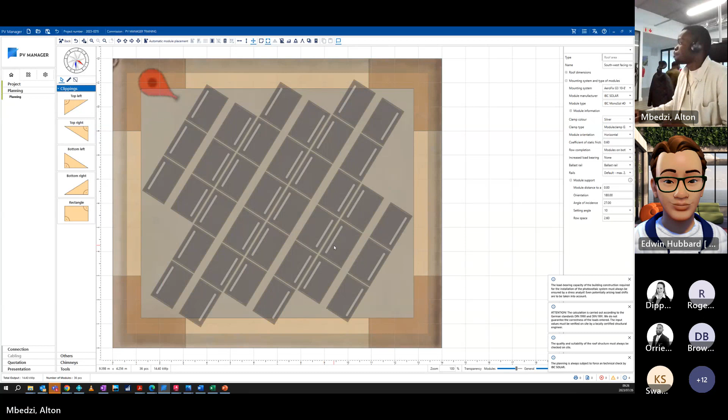You just double click onto that square that you put in, or that building that you put in, and then this is what will come up. And then you can now decide to click on automate module placement. Now this is where you'll decide if you want to stack as many panels as you can, using full roof area, maximum number of modules. And you just click OK. And then you'll be able to see, okay, this is how many modules I can fit in, maximum.

But in this case, I want to be a little bit more specific to say I just want to put on 10 panels and I want them to face north. So then just say, okay, let's go to the mounting structures. As you can see here, you have Aerofix G3 8 south, 8 east-west, 8 south, east-west, south, east-west. These are all our Aerofix G3 modules with different degrees and inclinations.

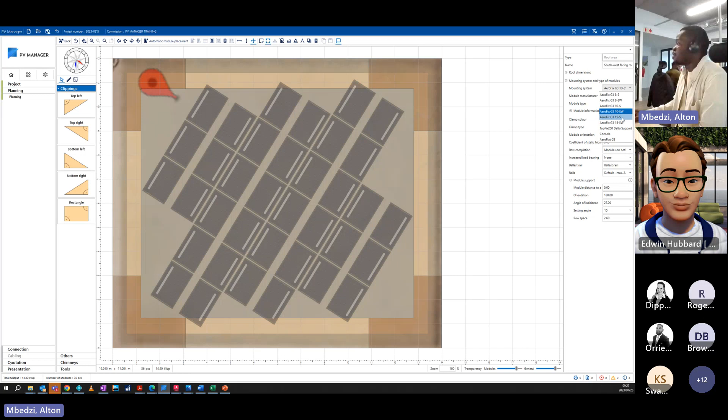So we will then work with, for instance, I'll pick Aerofix G3 15 degrees south. So I'm not being specific. And then I'll just click on that. And then I want to choose which modules I want. So I'll show you now - let's say I pick Longi.

If you click there, you'll see nothing is happening on my module type. This tells you that Longi is not compatible with our mounting structures. If you come across that, just know you need to pick a different module, because perhaps, as in this case, the Longi modules are actually bigger than 2.1 in length, and our modules only do 2.1 maximum. So pick a different module, Jolywood.

Same case there, so do not be shocked, maybe thinking there's a glitch. It's just that PV Manager is trying to block you from doing a design because it knows the module will not work.

So I'll then pick IBC modules, and you can see the module list comes up, which tells you that these modules do work with the mounting structures you've selected. I'll then pick, in this case, our 410 bifacial modules, and click it.

Now for clamp colors, since those are black modules, I'll pick black. And for module clamps, G3s, which is our latest mounting structure - you always pick the G3s. So it's very important that you know our mounting structures to do a PV Manager design, because that will help you in designing. If you're designing something, you want to know what you're working with.

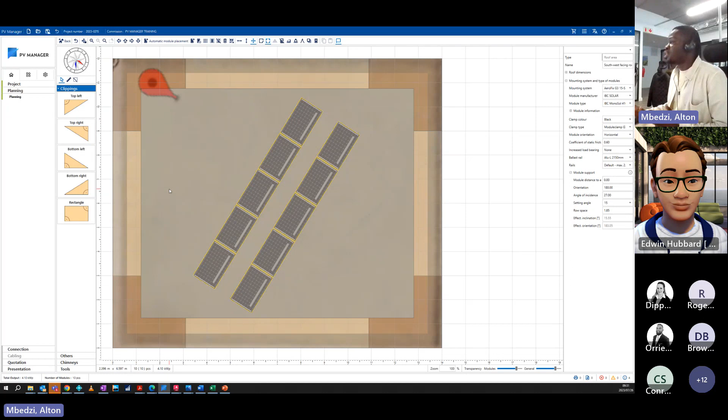So now I have my modules put in, and I'm happy with that, so I just click back. And there you go, you'll be able to see your modules there. Then, if this is what the client wants, you can send it to your client to show him how you'll be putting your modules. You can always do it according to how - for instance, you could put your modules there because you still have enough place.

But this is just for training, just to show you how to use PV Manager. So once this is done, as you can see, everything is green, meaning you're all good to go. We then go to connection.

Now connection will help you determine what inverter you need to use. You can see there that it's gray, so no information has been placed in yet. So I'll click on inverter configuration and go to group 1.

Now what you'll see is the manufacturer. This is all the inverters that we do sell. You'll see Fronius, Goodwe, and SMA. We do sell Victron as well, but Victron has a separate MPPT, so that's a different case. We are able to help you in designing a Victron system. If you do need help, contact your sales manager, and they will point you towards the technical department, and we'll offer you support on that.

So for today I'd like to use Goodwe. Goodwe has the new ES20s. Actually, let's do SMA instead. I'll choose SMA because I want to put an SMA. I like the system, I like the inverter. It's nice.

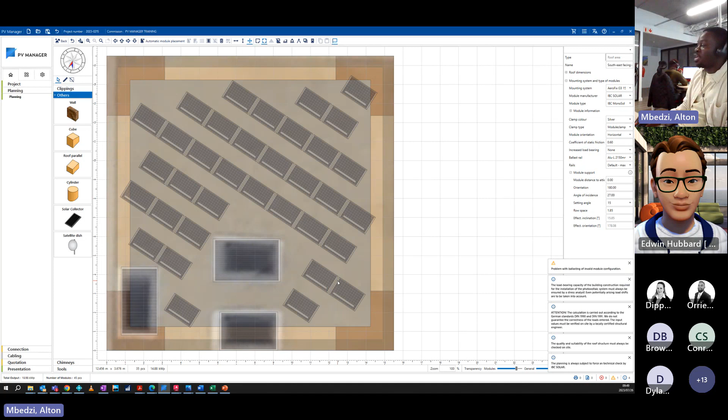Just something to note, which I didn't mention. And then your ballast rail, we did mention that we don't have ballast rail, so you have to use your Alu-L. It's very important that you know our mounting structures, and you can use different modules. You can pick maybe to use, okay, maybe let me use 425 in this area. We'll do that, and then let's populate. And then we have populated on our roofing. So let's say, for instance, now I just don't want to put so many, I'd want to put maybe 10 also.

So on this section, you will see warnings and information such as this. Planning is always subject to a technical check, which will then be done by a structural engineer when you go inside.

So let's just do it this way. Let's say, okay, let's move our modules. Just want to show you how that's done. So that's how you move your modules. And if you want to delete a few modules and say, okay, maybe I don't want 10, I want 4, you can just select and delete.

Okay, then we go back. Then you are able to do a 3D view. It does take time if you want to do the whole roofing. You can do a 3D and just click on that picture there, 3D view, and your 3D will come up. Just see which window it's coming up from.

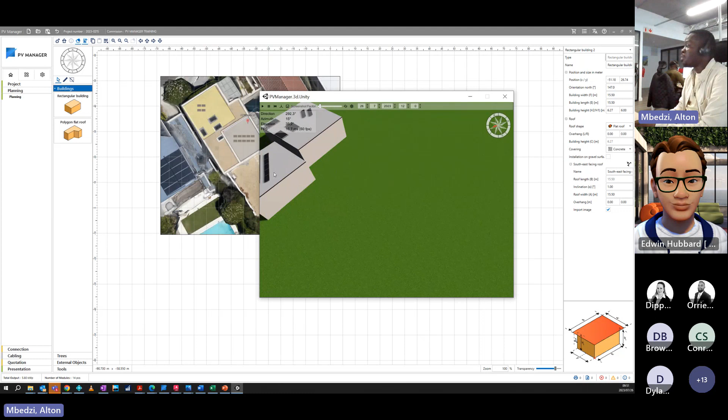It's coming up from a different window. So if you have a look, if we did a full proper design, we would then be able to have a 3D view such as this. As you can see, it's a flat roof.

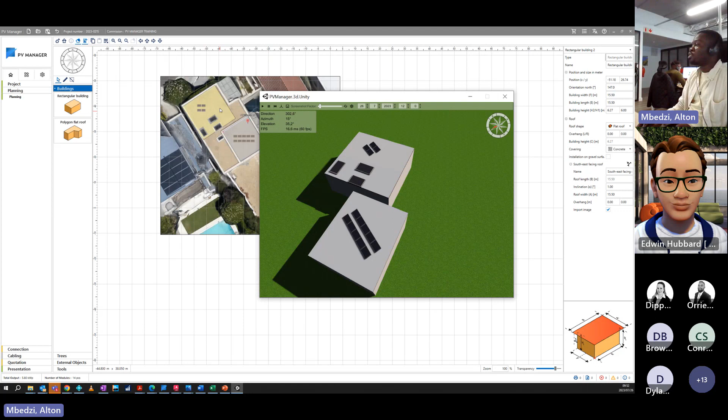There's our solar collectors and IBC modules that we put onto the roof. So everything can be worked out if you shift a little bit and cover all the angles, and then you will have a proper view or proper scale of your roof.

Another thing I would like to show you is, let's say, for instance, you don't fully understand how the bill of material came up. You can see it, but you want to go on site and do it by yourself.

You can always come up to display mounting structure, which is there. And then you can see your base rails there. Okay, there's 1, 2, 1, 2, 1, 2, 1, 2, 1, 2, 1, 2. So that makes it up to 2, 4, 6, 8, 10, 12.

And then you see there is a connection point there. Then you get to see, okay, there is a butt connector, which we normally use two of. So you'll have 2, 4, 6, 8, 10, 12 base rails. So you are able to see and have an understanding on how PV Manager Design actually did it or placed it.

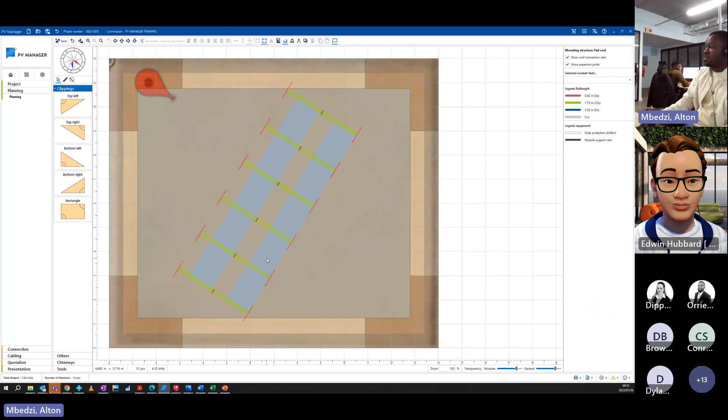And then, as you can see, show ballasting, you can see the kilograms there, 122 kgs. This is where you'll be putting in your ballast. So it sort of gives you the whole detailed installation.

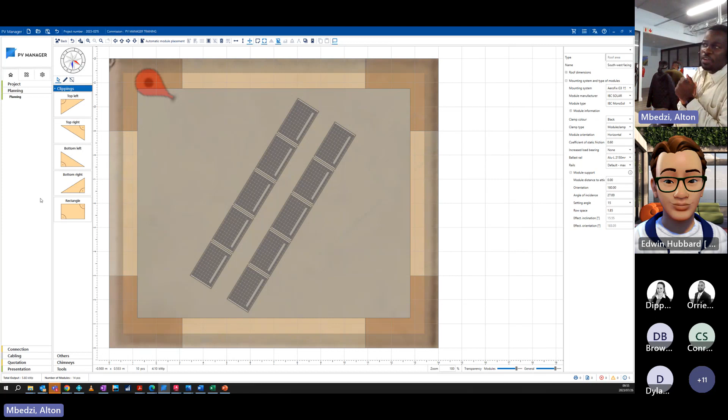So it's a very well-priced PV Manager design, and I think you'd enjoy it. It's very cheap in comparison to using systems such as PVsyst, Helioscope. I think PV Manager comes in at a very well price.